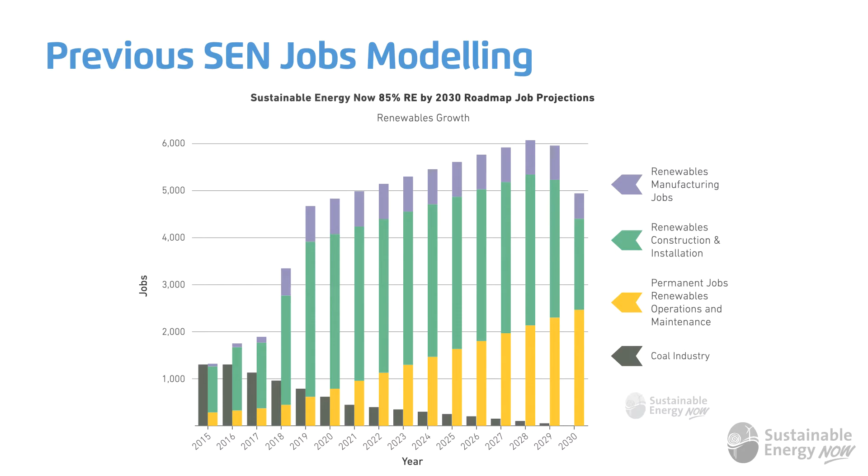There are two general approaches to jobs modelling. Economists tend to use input-output tables of data that go back decades in terms of how many people are employed in what areas associated with a certain budget size. The other method is for energy projects in terms of capacity - engineers tend to use that. SEN is made up more so of engineers than economists, and we can do quite detailed modelling around the energy, whereas economic modelling becomes a bit more fraught, particularly for us. So we went with capacity modelling. There's various pros and cons to each type, and costs in these technologies are moving more rapidly than in other areas, so sticking to capacity can be beneficial in that way too.

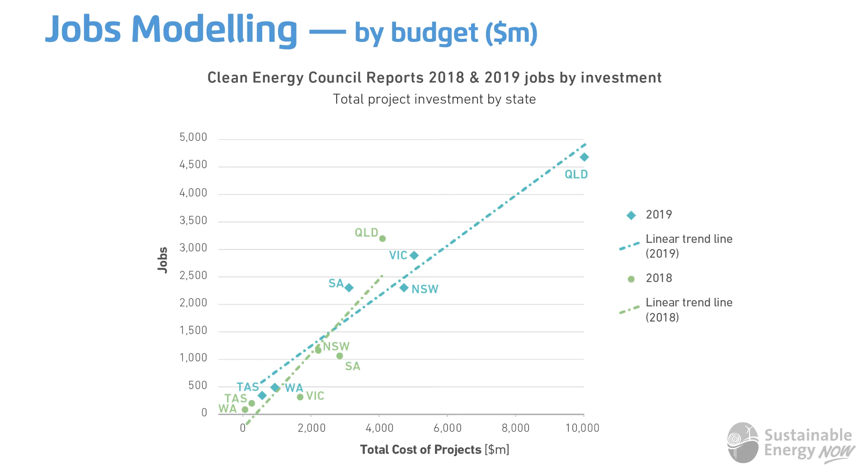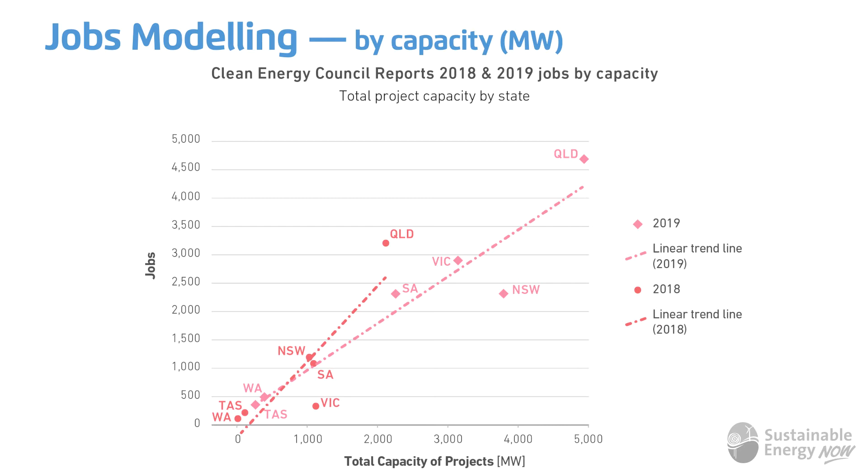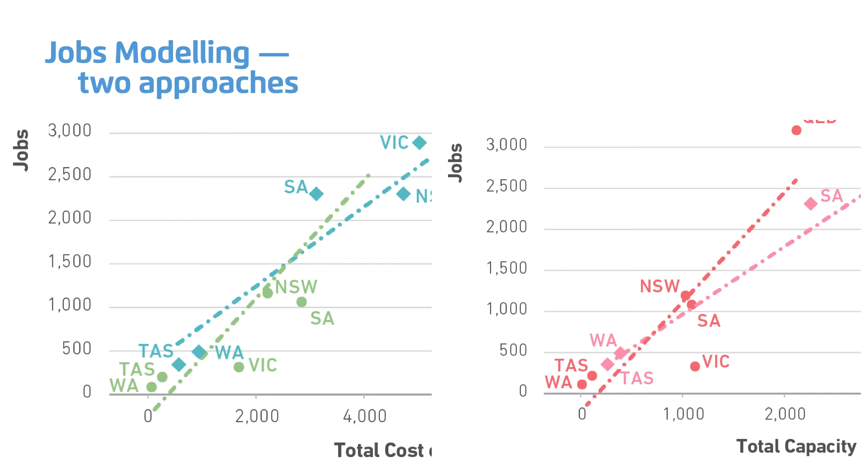This is just some summary data that the Clean Energy Council has put in their past annual reports - 2018, 2019 by state, and jobs versus total budget, total cost of CapEx. You can see there's a general trend. This is the same projects in 2018, 2019, same division by state, but jobs per megawatt. You can see there's a general trend line there for both years. There are some outliers, but as a rule of thumb, there's some association. Of course, if you talk to academics in this field, they say you can't use that data because every company reports the job numbers in different ways and they omit different things. It's really just to show that general trend at a very gross level. You can see WA down here at the bottom, almost nothing in 2018 and getting going in 2019.

Not going to talk much about the climate science, but it's very clear to us that we need urgent action. The stationary energy sector is a key place for that action - Ursula would have already been talking about that. The 1.5 degrees report from IPCC was interpreted by a lot of people to mean a lot of different things, but for us it means we need rapid decarbonisation, particularly in the electricity sector, because we can leverage that into transport, buildings and industry. We've even seen papers now suggesting we could be at 1.5 by 2025. So staying below 1.5 without overshoot or drawdown by 2030 is extremely challenging, and we think it needs to be prioritised by all governments at all levels, in particular the state government of Western Australia.

Our jobs model is made up of three parts, if you like. There's an energy model, which says how much and when. There's a thing called decline factors, which relate to the falling costs, or sometimes rise, but generally the falling costs of CapEx associated with the technologies that we're deploying in the model.

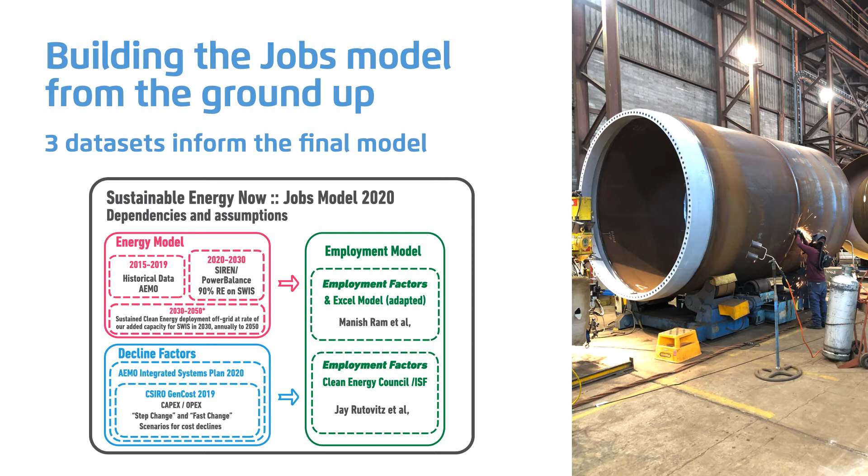And the employment model itself uses employment factors that came, in this case, from the Clean Energy Council, as well as academic research, plus a general model which brings all that together.

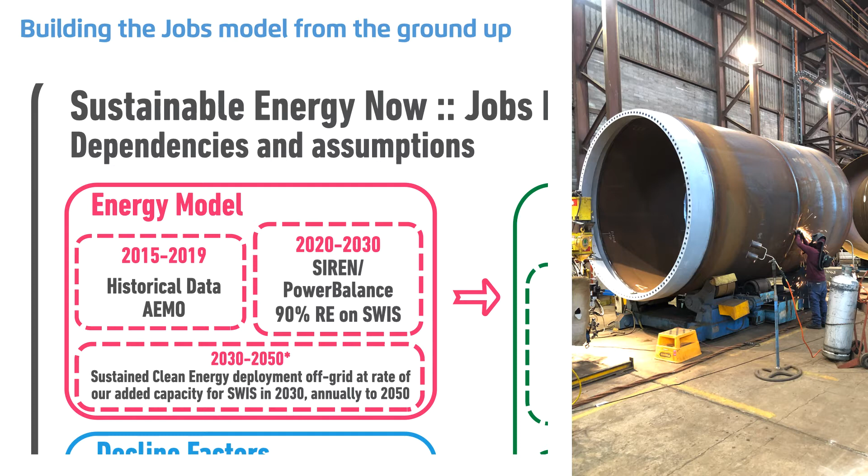The energy model is made up of historical data up to 2019. We used our own modelling tools to produce an energy model that accounts for every hour, 8,760 hours in the year, and makes sure that energy can be dispatched using the technologies we deploy, based on historical weather data.

This is what our energy model looks like over time. You can see green at the bottom is wind, followed by orange rooftop solar, utility solar. We think these are all realistic.

They move from historical conditions. It's not a step change jump. It's actually a pretty smooth transition given the amount of wind and solar that went in 2020, or is going to be commissioned by the end of the year.

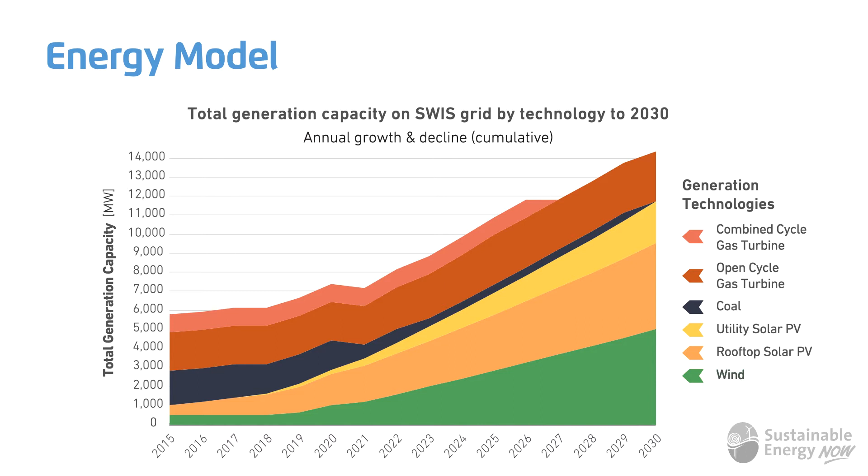There is a step change in terms of coal. We looked at retiring coal straight away, quite a lot of it. There is overcapacity on the system, and gas can cover that. We looked at increasing the amount of open cycle gas turbine in terms of backup and system reliability and security, and we look at decommissioning the combined cycle gas later on in the decade.

Utility solar would need to kick off. We've got Merredin going in, which is 100 megawatts this year, but we started with about 150, 160 in the first year, and it increases a little bit each year.

You can also see at the top there, adding the open cycle gas turbines. That just gives us the ability to power the grid without any renewables, and I'll explain why later.

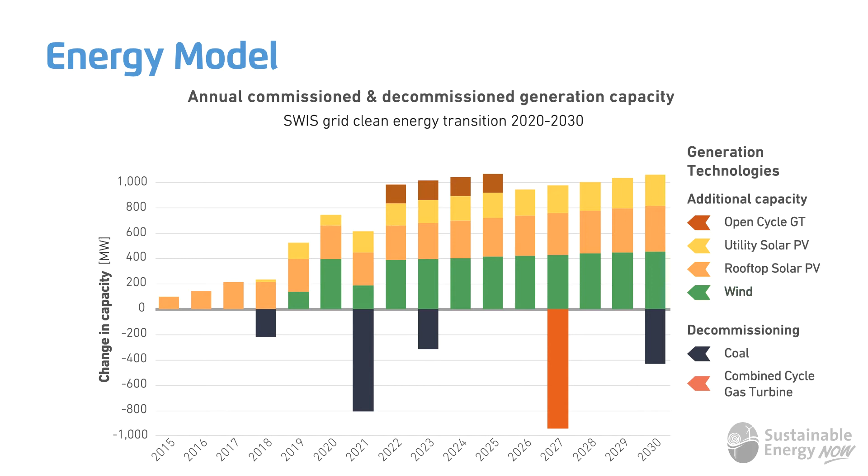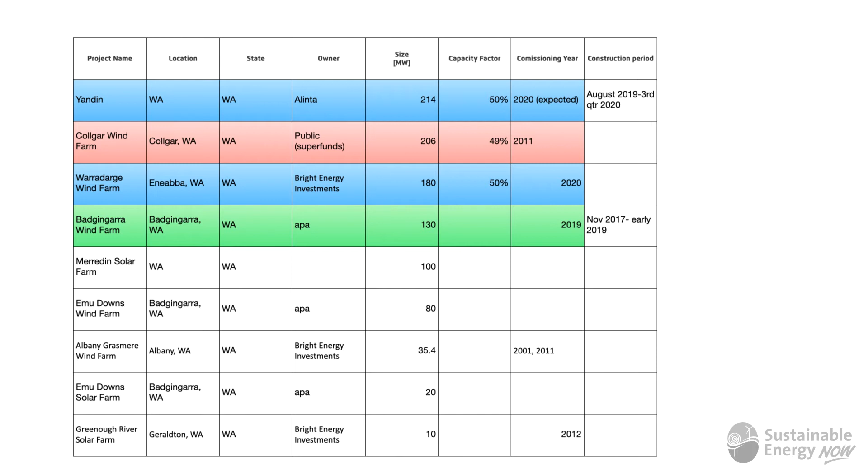Again, this is just the wind farms that have gone in. There's Collgar in the red, and Yandin at the top, Warradarge below Collgar, and Badgingarra went in last year.

This is why we need gas on the way to 100% renewables. We can retire coal, but there are going to be periods where we need gas, because economically viable amounts of storage are not going to cut it, particularly across the transition from the sort of 30% to 80% area.

Not to say that we're going to burn more gas than we burn currently — we burn a lot less. We burn 10% of the mix as opposed to 43% today, but it needs to be there until there's enough renewables and storage to cover any eventuality.

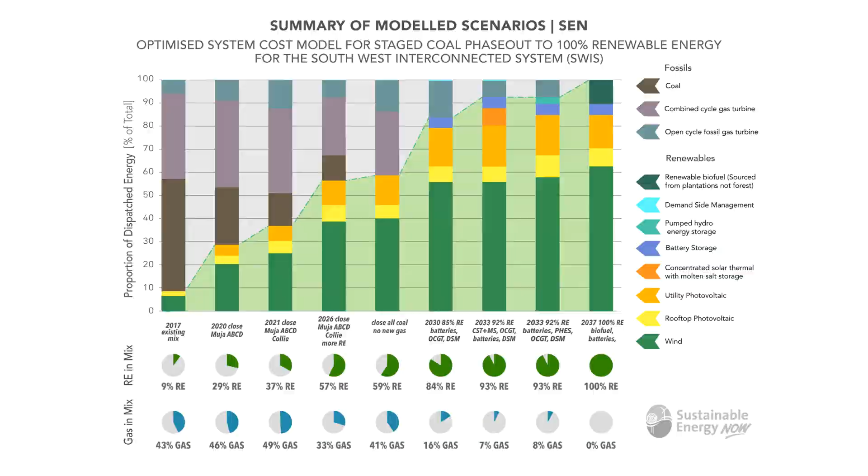Decline factors, we've used the AEMO decline factors. They're put together by CSIRO - the CapEx cost of technology projected forward. So these are pretty arbitrary decline factors. We're using them because that's what people are using at the moment in industry. Some academics would point out that there's some very arbitrary assumptions in these, like CST just starts falling in cost in 2033, 2034. Batteries stop declining in cost around 2030. Yeah, it's pretty arbitrary, but it's what we've got.

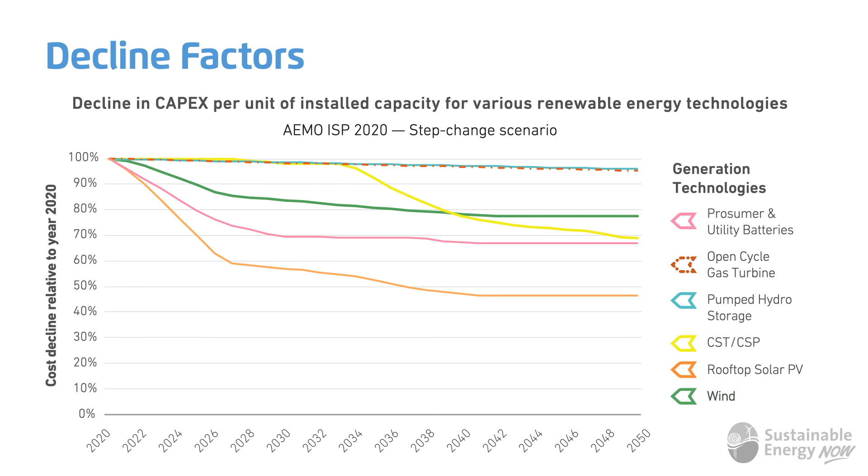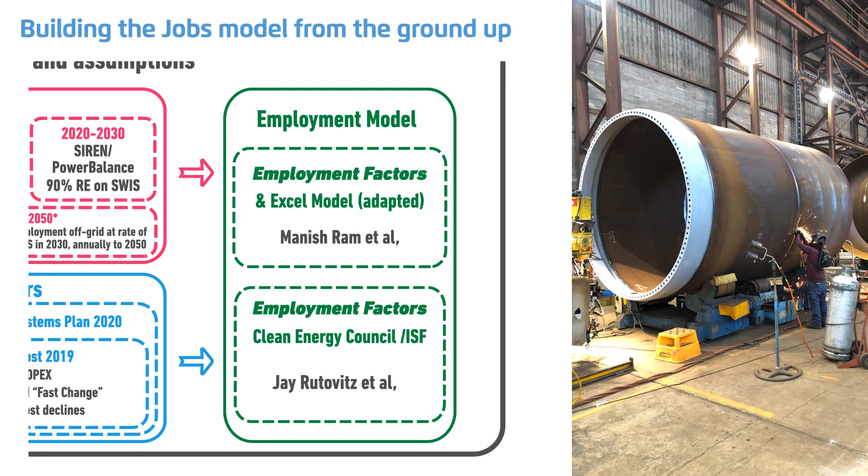So it gives us some idea - we use them to associate the loss of jobs in a certain technology. The decline in jobs per megawatt is associated directly with the CapEx. And that all comes together in a set of spreadsheets, and we've adopted various academic sources for how all these functions work together. This is the result.

We see to 2030, you can see wind jobs really pick up in 2020, then take another boost in 2022, and the light green is pumped hydro - very labour intensive, a lot of concrete being poured, a lot of earth moving, very suited to people who might have worked in coal mining down in Collie. Very similar kinds of work. There is potential for mine site remediation and conversion into pumped hydro as well, although there's many other sites on the Darling Scarp that would be applicable.

We started with very low numbers of prosumer batteries, and then as they become more economically interesting to consumers, there's a strong growth in that. Utility batteries, we've started at 50 megawatts a year, I think it was, and that grows also.

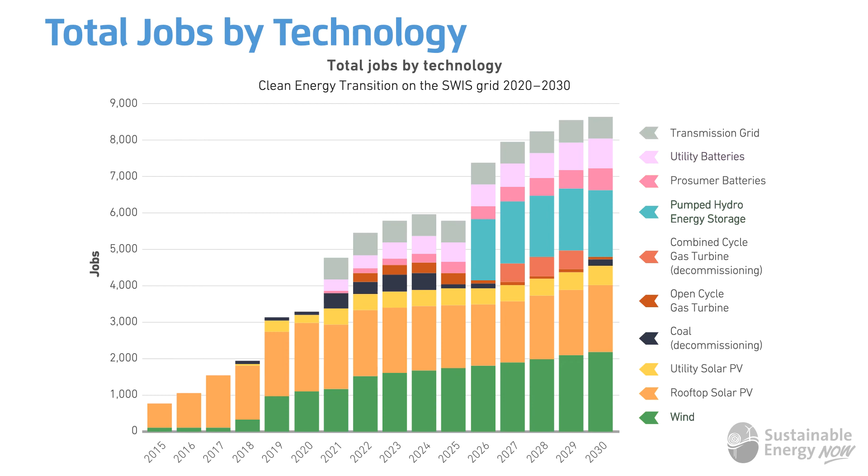Transmission jobs, we have been very conservative with. We've just modelled for high voltage AC line upgrades. We're not looking at maintenance jobs. We're not looking at manufacturing jobs associated with that. We're not looking at network jobs - changing the networks from one-way distribution to two-way distribution, and all the substation work that needs to go on around that.

This is the same data but filtered a different way. It's filtered by category. You can see that there's a modest amount of domestic manufacturing. That's pretty much dependent on whether there's a strong pipeline of work as to whether we can get strong manufacturing goals met for local content. That's happened in Victoria - there's a wind farm in Victoria that's assembling turbines. Vestas are assembling their turbines in an old disused car factory. So they're assembling them from major components. They're not doing all the manufacturing in Victoria, but I think it's 68% local content for construction and installation and 90% local content for operations and maintenance.

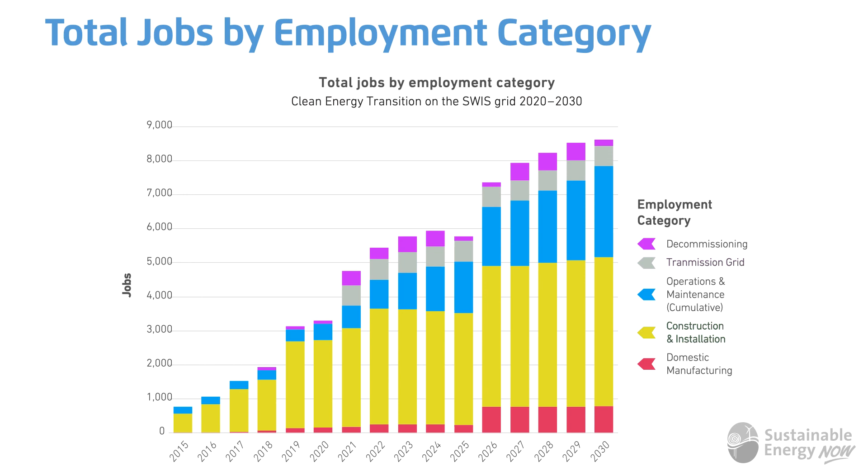Decommissioning - that is decommissioning of gas and coal largely at this stage in this coming decade. A lot of this employment is regional. We can look at wind being about 67% and solar farms being about 69% of employment in the regions. Operations and maintenance, 73% for wind, and 54% for solar.

Longer term, when we keep building solar and wind farms, there comes a point where there's a crossover where the operations and maintenance jobs, because they are ongoing jobs for the lifetime of the project - that might be 25 to 40 years - they accumulate. And at a certain point, there's actually more people working in maintaining the system than there are in building the system. So that happens in our model around 2033.

It's a bit like the painting of the Sydney Harbour Bridge. You actually start looking up around 2045 around decommissioning wind farms or repowering them and putting in new farms. And so by the time one set of wind and solar farms are being retired, you're building the replacements. And so it becomes a continual sustainable industry.